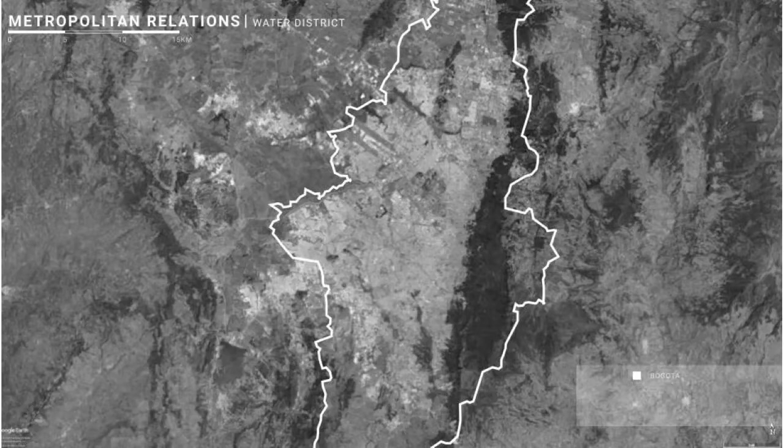The municipality of Mosquera, situated at the west of the Bogota metropolitan district, has become an epicenter of urban development. Characterized by its valuable agricultural land and industrial activity, Mosquera is part of the Ramada irrigation district. The complex network of canals that cross the land is the most distinctive feature of the site.

The water that flows through the canals of the savanna comes from the Gualí Wetlands in the north, and the upper basin of the Bogota River, feeding 5 main canals that run north to south.

The collecting canals run from east to west, defining the rural grid that characterizes the site and configuring the savanna as a man-made wetland. The canals also have a severe impact on the mobility of the site.

Below Calle 13, which splits the municipality in two, the rural roads alongside the watercourses penetrate into the site, with many dead ends and private bypasses that create a fragmented network.

Equally important is the presence of the rivers. The Bogota River, running through the east and the south border of the site, receives the water of the system in its union with the Balsilla River, which defines the west border.

Not only the rivers confine the site, but their large floodplains towards the south and the borders create high-risk zones that must be protected.

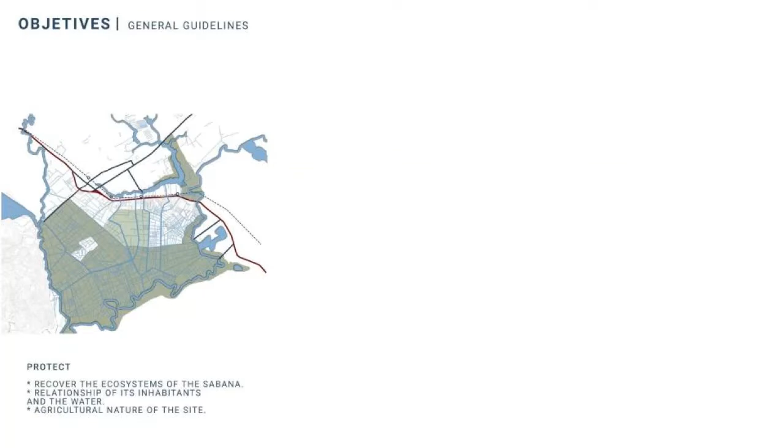Second, to overcome the lack of connectivity in the municipality, providing a network of corridors and connections within the savanna and the rest of the city to enhance mobility.

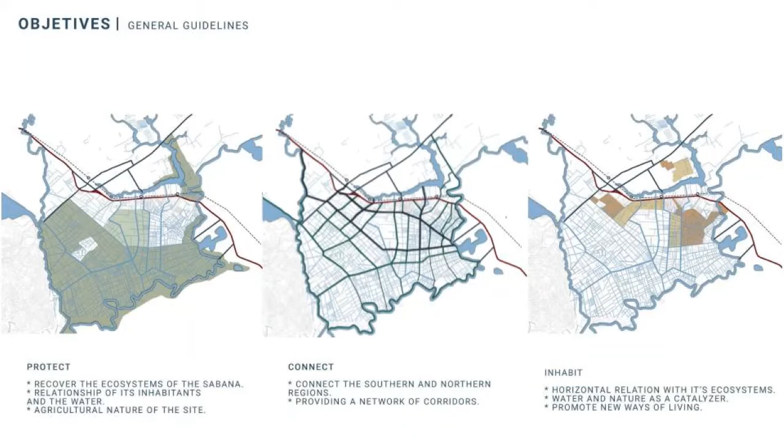And finally, to inhabit the savanna in a more horizontal relation with its ecosystems, using water and public space as a catalyzer to dilute segregation and promote new ways of living.

In order to achieve these objectives, the already existing features of the site became pivotal in the development of the territorial strategy. Following the main canals, the plan proposed a network of transversal and parallel corridors to help guide development and enhance connectivity. With large protected areas that seek to keep urbanization off the floodplains, development is oriented towards the Calle 13 and the parallel corridors.

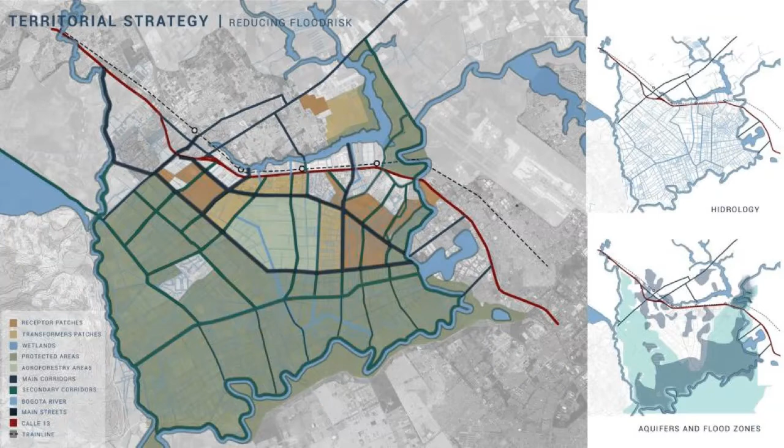An agroforestry area in the middle aims to articulate the eastern and western developments while providing room for institutional presence in the area.

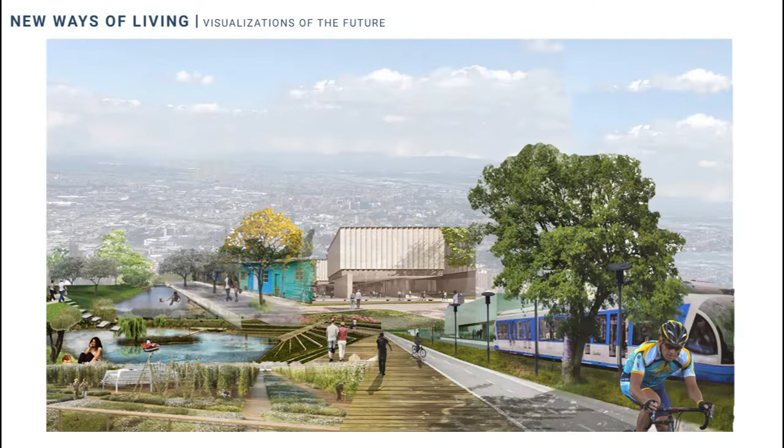Having defined a territorial strategy, the visualization to collage helped define the spatial quality of the project. Naturally, the integration of water into public space was a prominent feature of these explorations.

Visiting the experience from cities such as Lingang, Rotterdam, and Houston, we were able to conceptualize a comprehensive strategy surrounding water. A holistic approximation to water became fundamental to achieve a more harmonic way of living in the savanna.

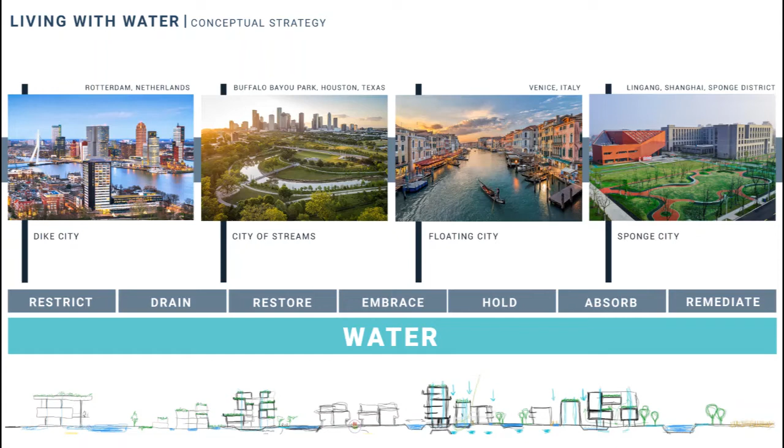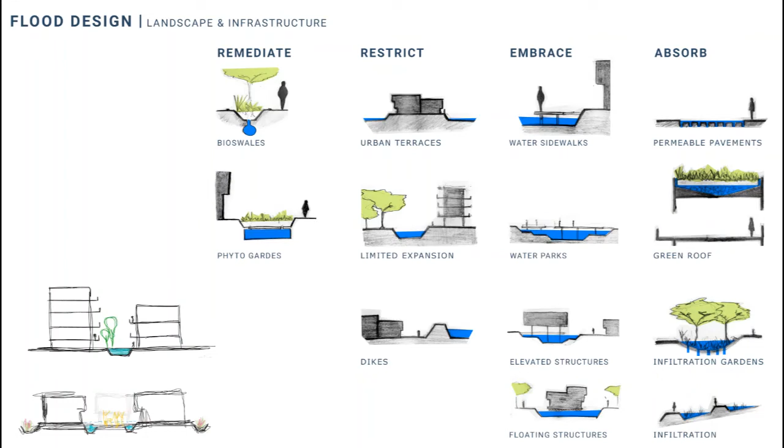Aiming for the spatial qualities of water, each of these strategies breaks down in landscape and architectural techniques. Going beyond traditional notions of infrastructure, this vision aims to create experiences surrounding water, enhancing resilience, sustainability, and recovering the ecosystems of the savanna.

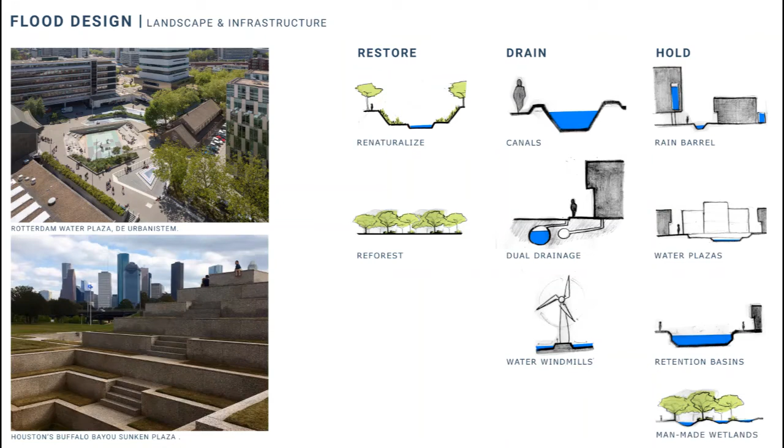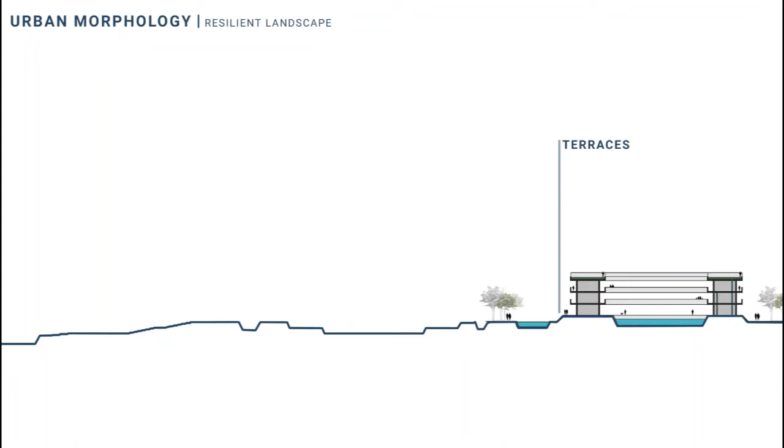These strategies are reduced to 3 operations in the urban morphology of the site: to restore with terraces, to embrace with platforms, and to hold with basins.

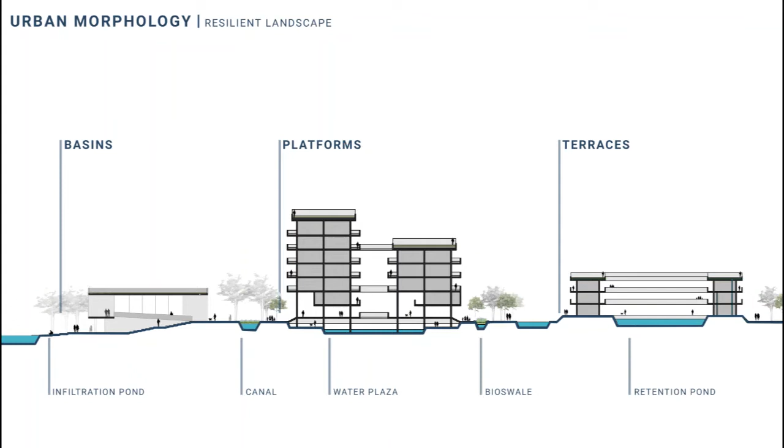Before any intervention, taking a closer look at the morphology of the site was necessary.

The self-constructed patches are characterized by their high density and lack of public space.

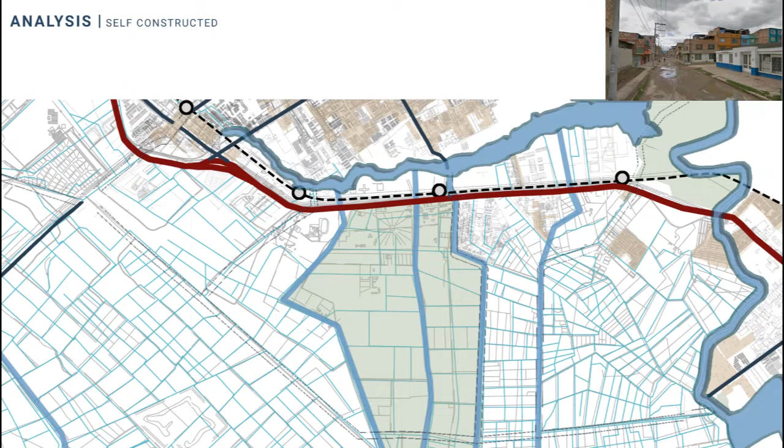The private developments are usually isolated, with density ranging from high-rise multifamily buildings to country villas.

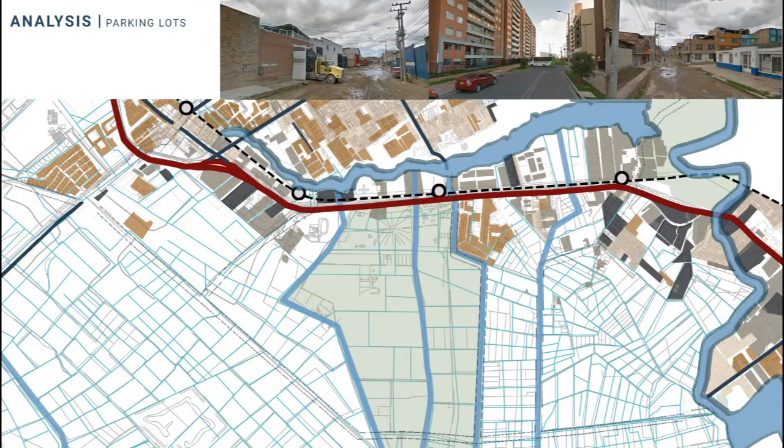The industrial activity concentrates towards the Calle 13 and the Bogotá River, with agricultural facilities also spotted in the heart of La Sabana. These activities are usually linked to junkyards, which are prone to spontaneous development.

The lack of urban facilities and institutions is also evident, with very few schools and universities scattered in the territory.

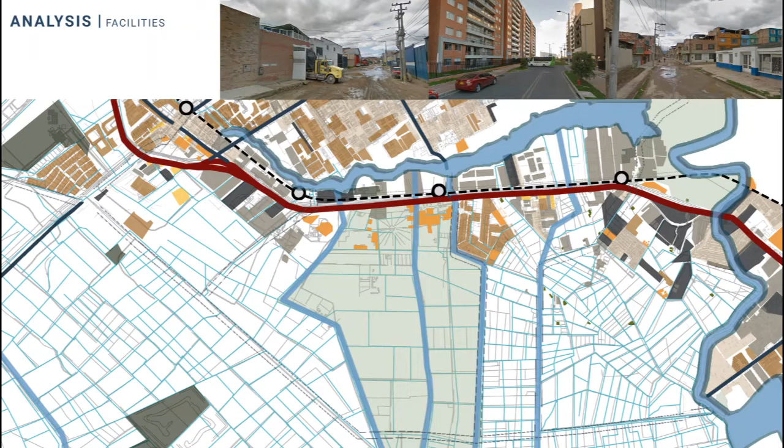Incorporating structure into the territory, the mobility system connects pre-existing features and helps to scale down the proposed urbanizations into urban islands. Embracing the patch-like morphology inherent to the agricultural fabric, the foundational urban structure was established.

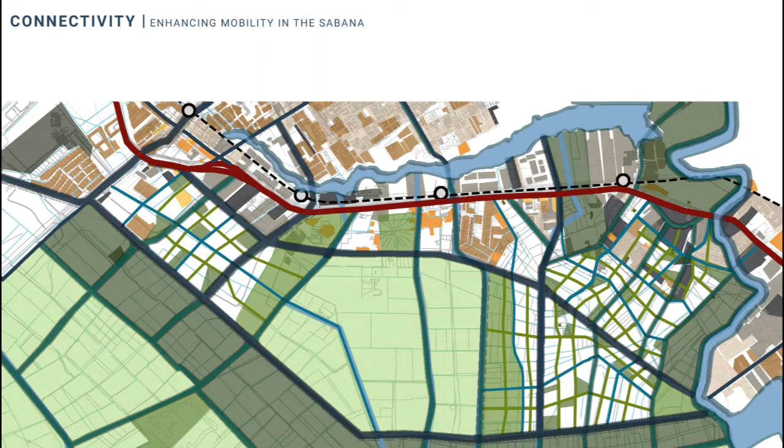Aiming to create a more interconnected and flexible urban fabric, a secondary mobility armature was defined. Connecting the eccentricities of the patches using the existing features allowed for a parallel and more fragmented structure to balance out the main corridors. The proposed network of corridors seeks to enhance connectivity in La Sabana.

These corridors adapt the course of the existing canals, creating an interconnected mobility system and defining the different natures of the corridors, answering to the conditions of the site and their role within the plan.

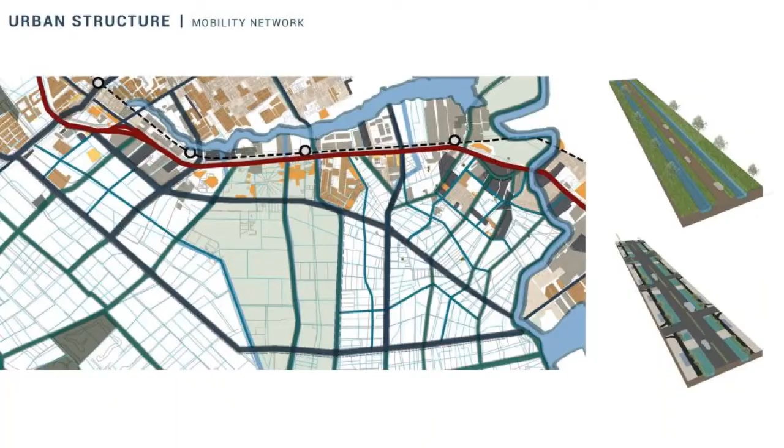To have a better understanding of the urban fabric within this structure, we took a closer look at two sectors in the plan. The first sector, located toward the north, aims to explore the transitive conditions between the proposed development and the pre-existing features of the site.

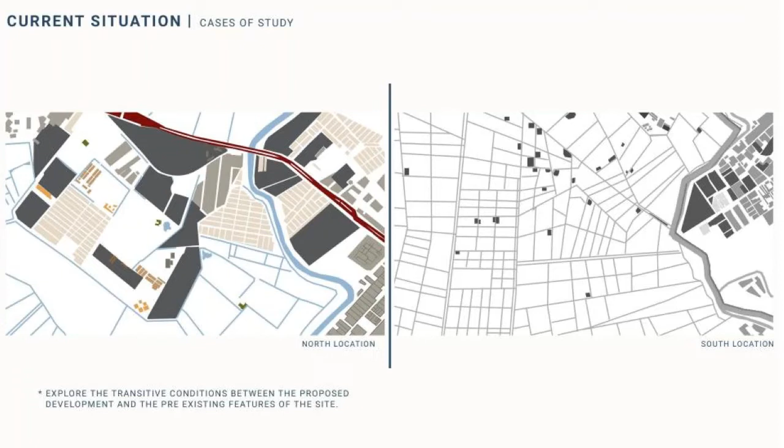The second sector explores the borderline conditions with the proposed urban expansion, where dealing with the existing canals and the higher risk of flooding plays a major role.

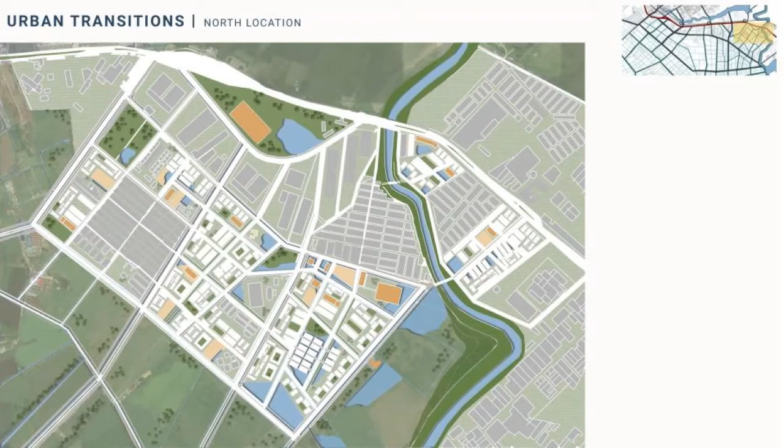In the north, developing alongside the west margin of the Bogotá River represents an important flood risk. The border developments, built over terraces, create a physical barrier which conducts runoff water toward the basins in the center of the urban island.

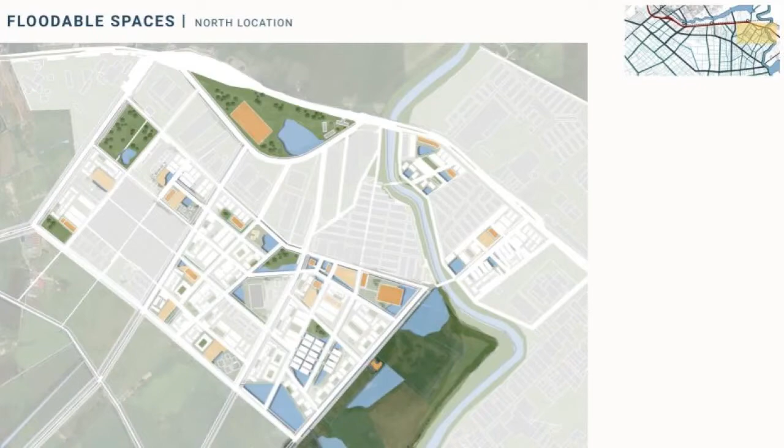The flood prevention system of the site is robust, including a combination of open spaces and urban facilities designed to withstand and absorb water. This system not only reduces the risk of flooding, but also helps to spatially integrate the pre-existing features of the site with the rest of the proposal.

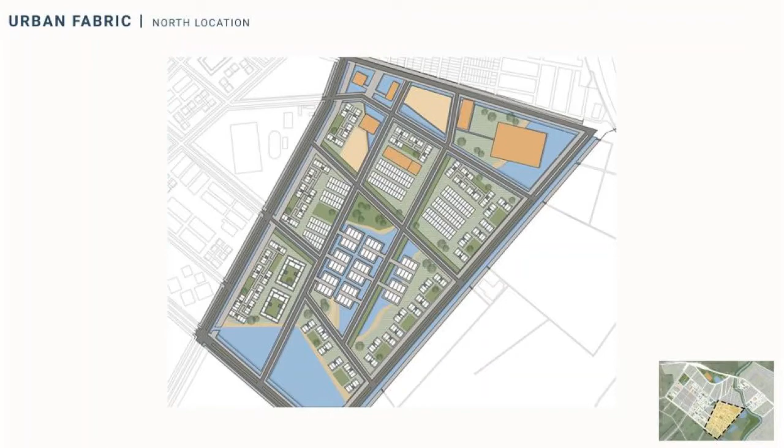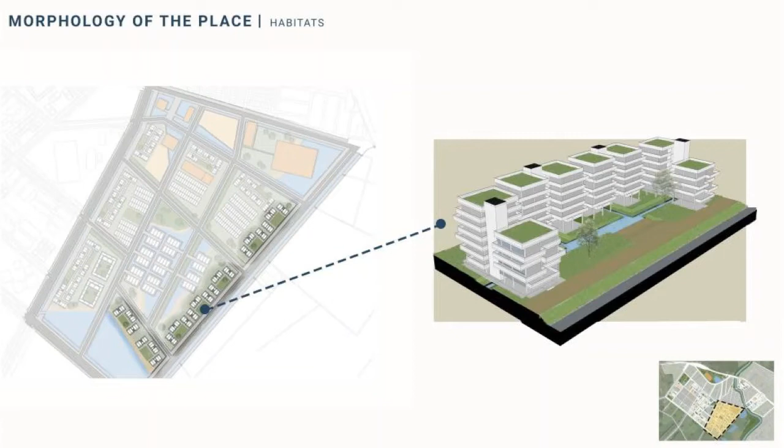A closer look into the urban islands clarifies the morphology of the place. High-rise buildings create the protected belt of the site, elevating the ground level against the river. The self-constructed habitats take advantage of this protection, developing towards the center of the island.

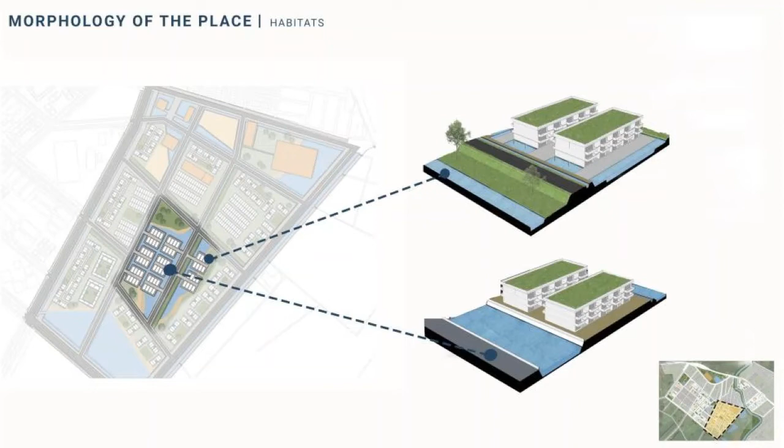Inhabiting the new basins, the progressive housing solutions allow for a different alternative for the newcomers of the city, living directly on the water.

This diverse urban fabric is complemented by a set of urban facilities and open spaces that are integral to the water infrastructure of the city.

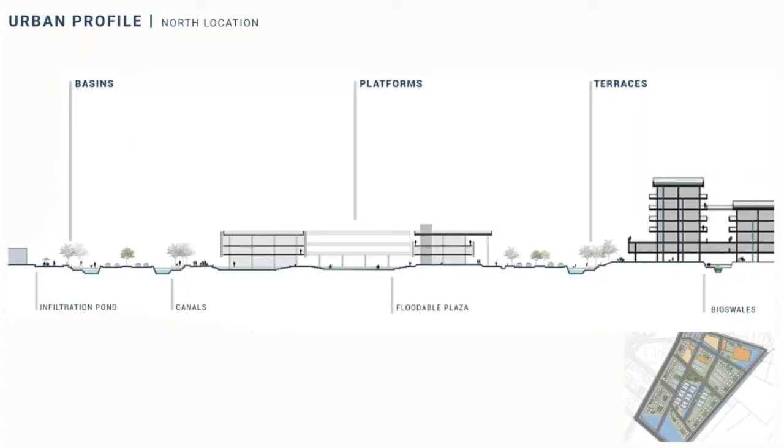This public space system articulates different stages of development, offering gathering points and invaluable open space for the community to interact and get closer to the water.

The facilities provide basic services for the communities, while also protecting and playing a major role in the flood prevention system.

The urban frontier takes place closer to the southern margin of the Bogotá River, also dealing with high flood risk. In this site, the strategy is similar, creating a flood buffer towards the borders and a network of basins to distribute runoff water.

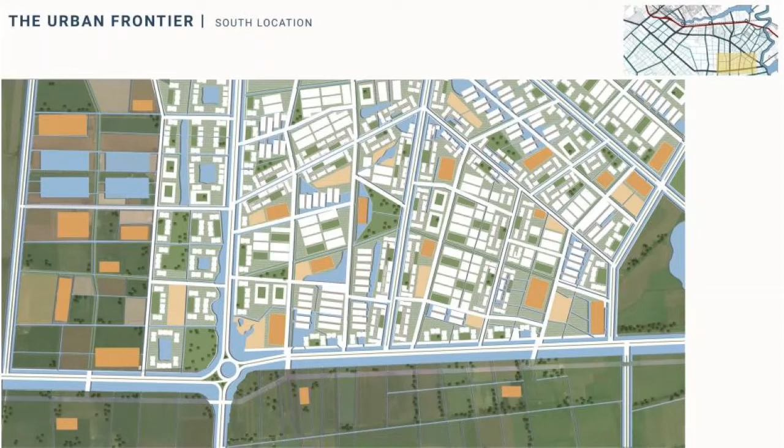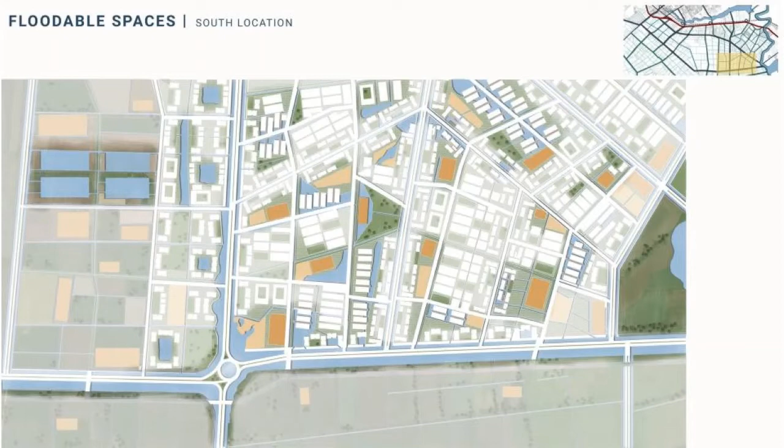Despite being the same strategy, the different pre-existing conditions allow for a more atomized system, diluting the risk in a more homogeneous way and bringing water deeper into the urban fabric.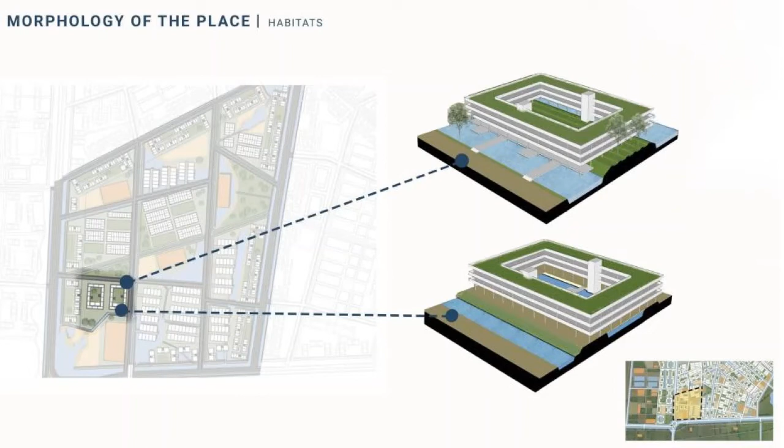In the urban fabric, different ways of approaching the water take place. The communities' cluster-like structure embraces the medium in different ways, involving productivity and water infrastructure at their core.

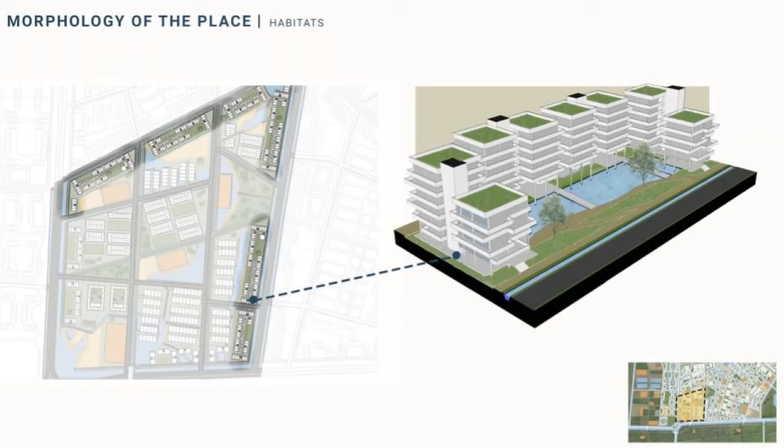Also, more grounded developments take place toward the main corridors, creating horizontal experiences toward the mobility system, enhancing interaction.

Big promoters of community interactions are the public spaces. Deeply integrated with the urban facilities, these pieces of infrastructure offer different ways to get closer to the water.

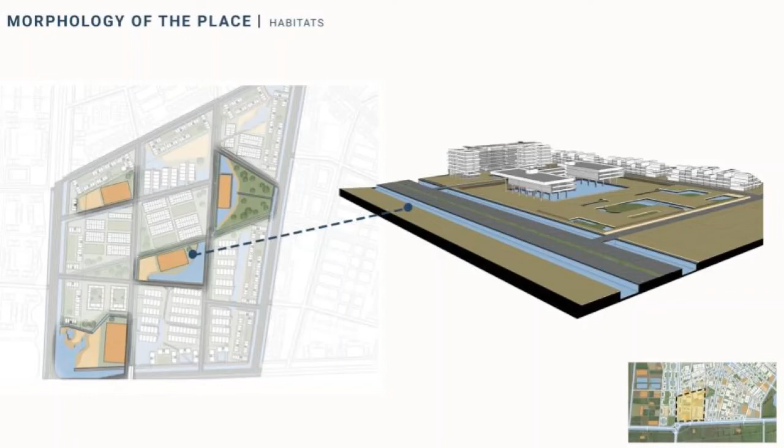But the urban facilities fill roles beyond interaction and integration, without leaving behind their role in the water management scheme. These can also become important attractors of activity, promoting development and positioning Mosquera as a new centrality.

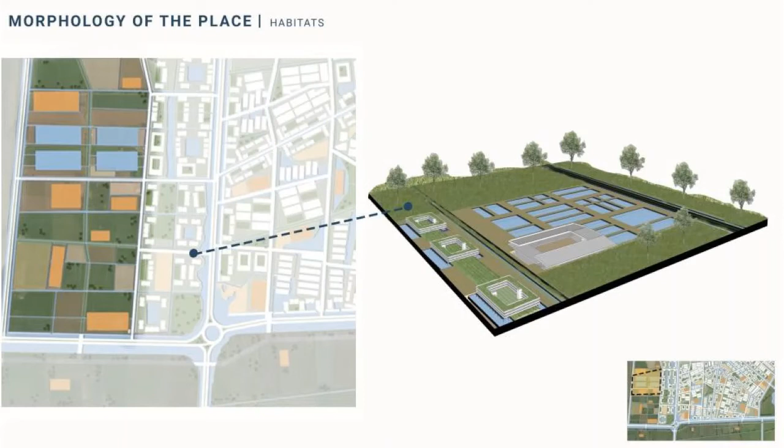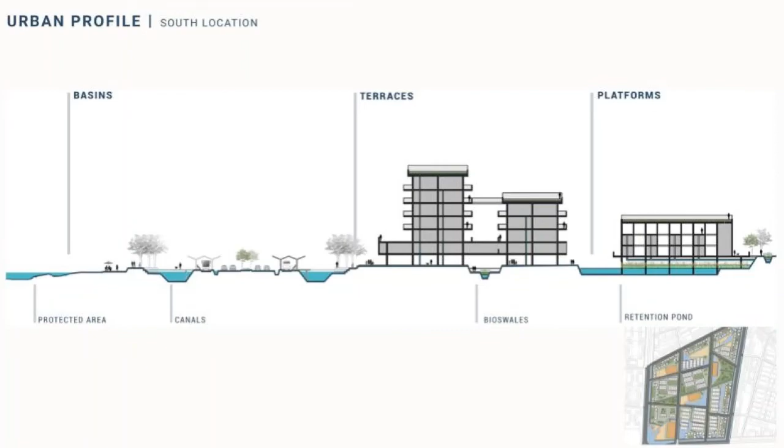Once again, articulating these approaches of life alongside water offers a different perspective on the future developments of La Sabana. Learning to preserve this medium is vital for the emerging communities of Mosquera and the recovery of its ecosystems.

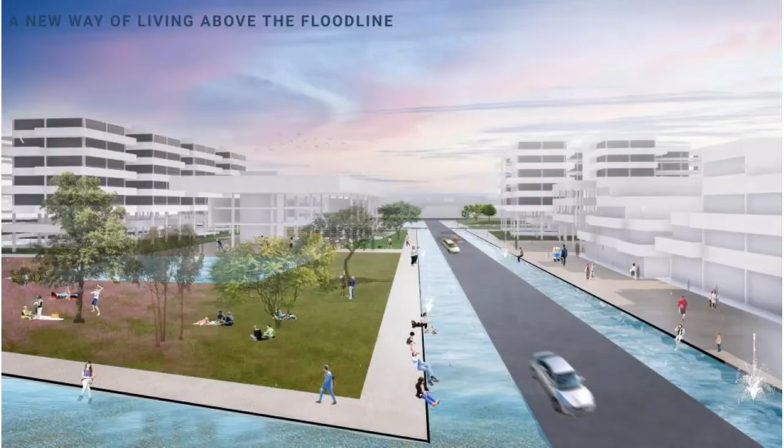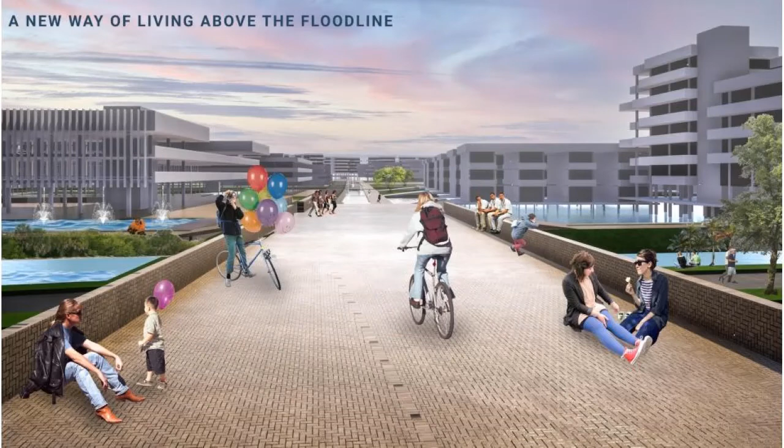The development of these strategies aims to offer a possible way for development and urbanization in such a unique place, embracing and exalting the features of the site while providing a setting for healthy and heterogeneous urbanization. This could be key for the future of La Sabana, with water playing an important role in washing away the walls of segregation and inequality.